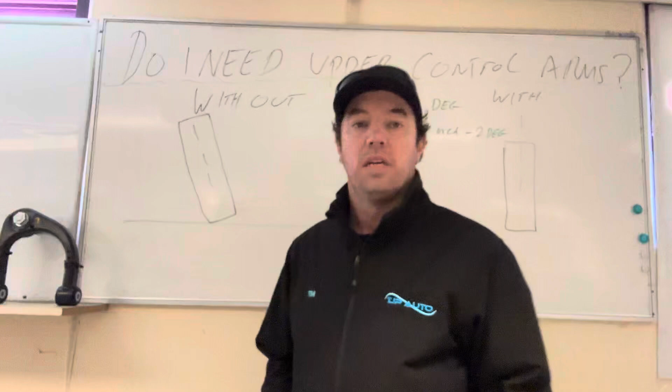One of the most common questions we get asked when quoting and speaking to customers about lift kits is, do I need upper control arms?

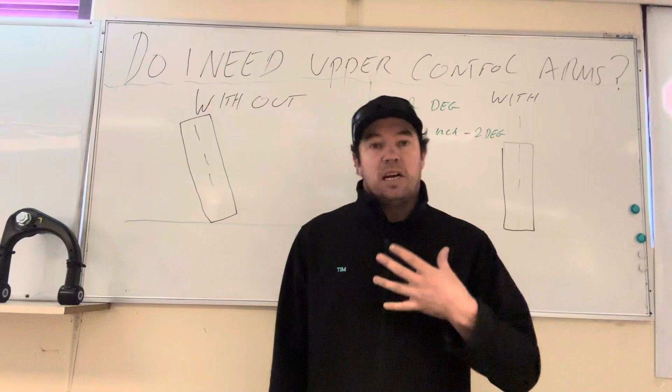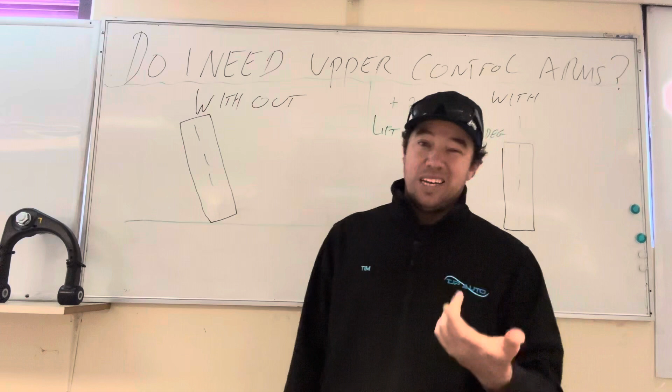As a general rule of thumb, if they are required to lift your vehicle for a 2-inch lift, which is most of the sizes that we do, then they'll be included in the kit. Most vehicles don't require it. One that does is the NP300, the latest series NP300. The 2-inch lift for those comes with upper control arms because you need them for clearance and for camber correction.

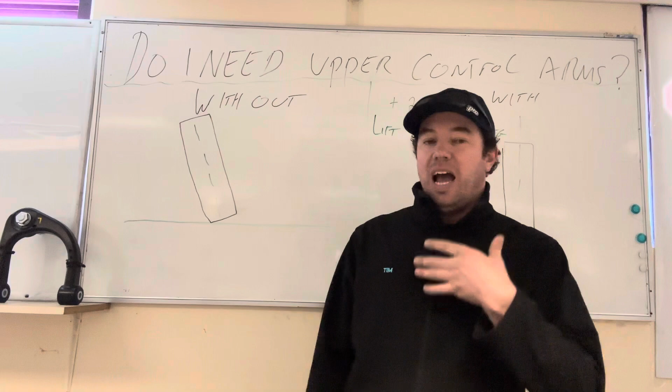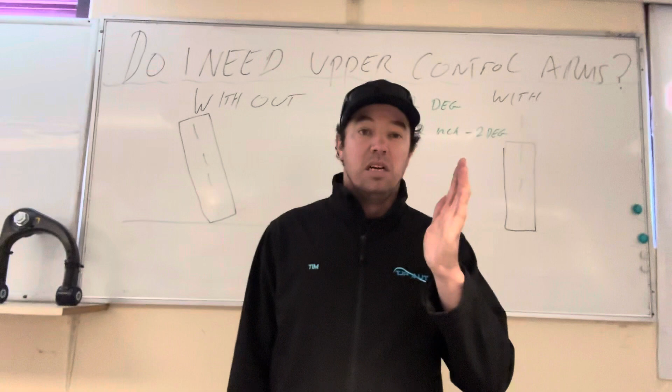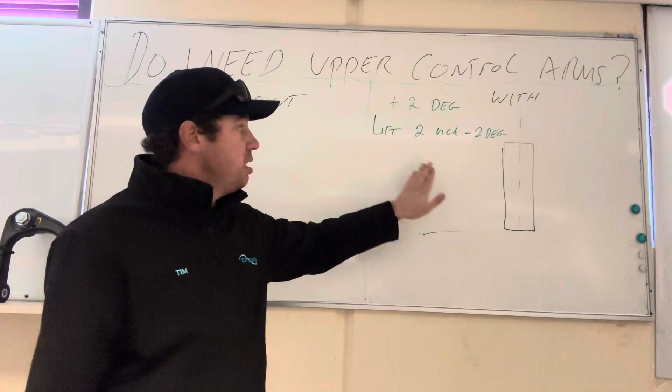But as a rule of thumb, you don't have to have them for most 2-inch lifts. Anything over 2-inch, you generally do. The reason why you do need them is because basically every inch you lift the vehicle, roughly about 1 degree of camber or caster is what you lose. So you lift the vehicle 2 inches, it changes at approximately 2 degrees.

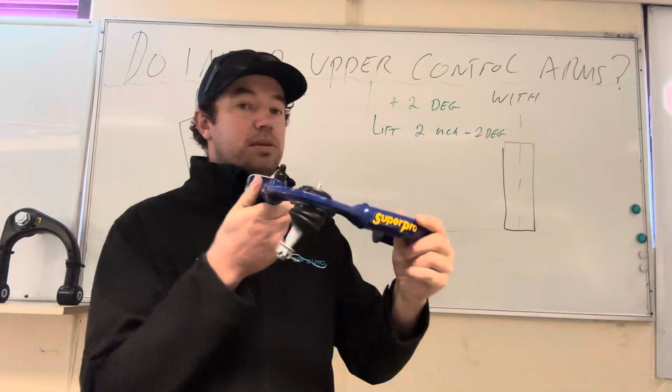When I say most, I'm going to talk about SuperPro control arms because that's what we sell. This is a fixed offset SuperPro control arm. It has an extra 2 degrees built into it, so it's preset with an extra 2 degrees to suit a 2-inch lift, even a little bit above, because most vehicles have at least 2 degrees of adjustment in the wheel alignment. So we can adjust it 2 degrees and this gives you another 2.

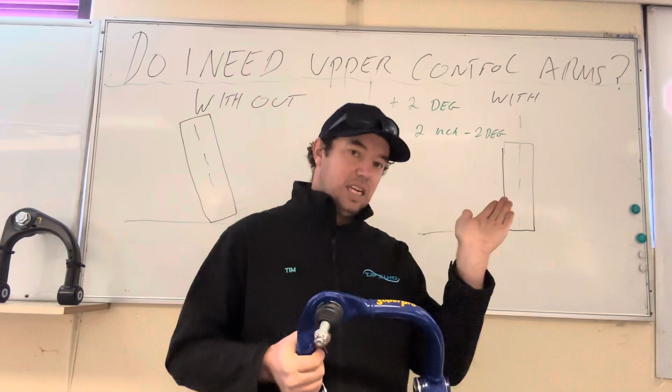And this is a fixed offset control arm. The other one is an adjustable. This ball joint slips and we can adjust it. This is a Super Pro one as well.

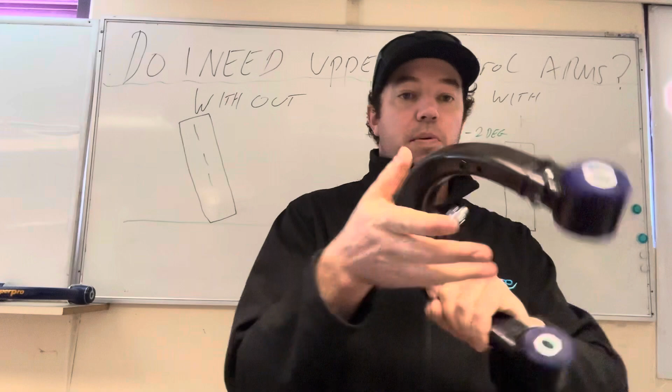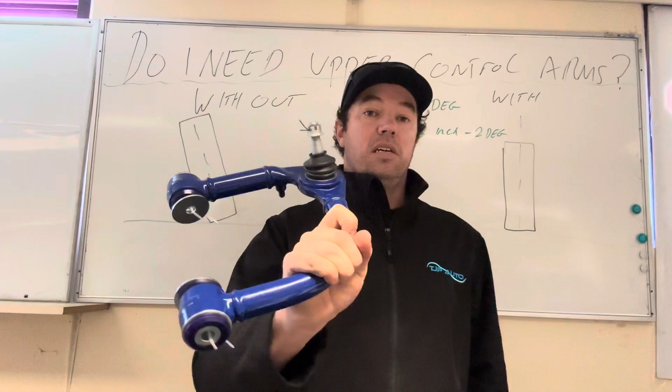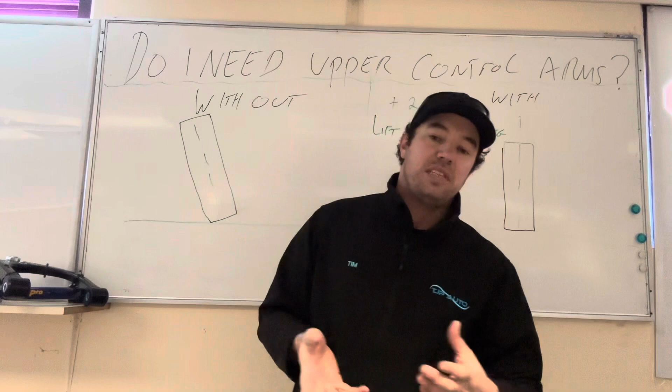So no, it's not required. Do we recommend it? Yes, generally we'll say, look, if you're lifting it and you've got the money, put arms in it. If you don't, put them in later.

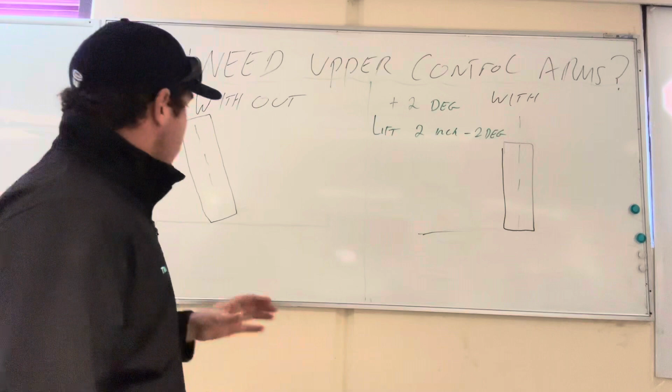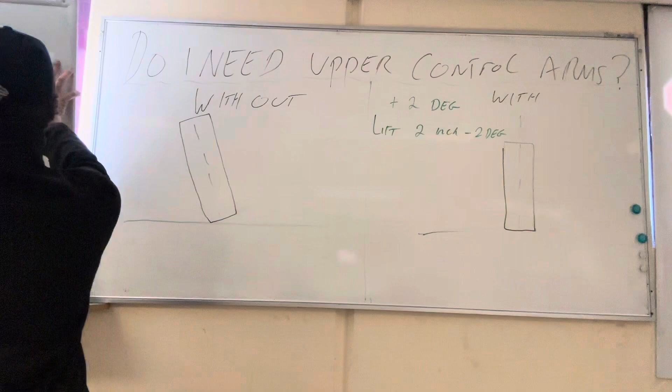Basically, as you can see here, this is exaggerated to make it easier to see, but without control arms, as the vehicle lifts, the wheel will start to roll in and it will run on the edge. What happens with the control arm with the extra bit of offset in it, it allows us to be adjustable and to push the top of that wheel back out a bit more, and it corrects it and keeps the wheel nice and straight so it's running on its flat surface.

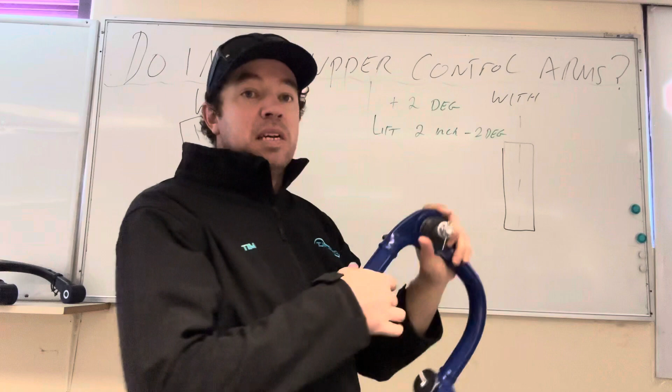So do you need them? Most of the time, no. Do we recommend them if you can? Yes. Thanks, guys.